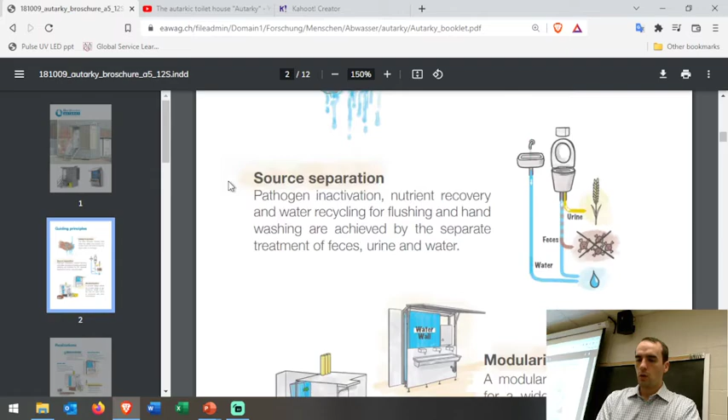Anyway, let me pull up that. There's first of all a brochure on the whole thing. I will post this in case you're curious - it goes into some more depth. I'll take a look back through this in a moment, but I'll go ahead and play the video for you here. Pardon me a moment while I get the sound situation set up.

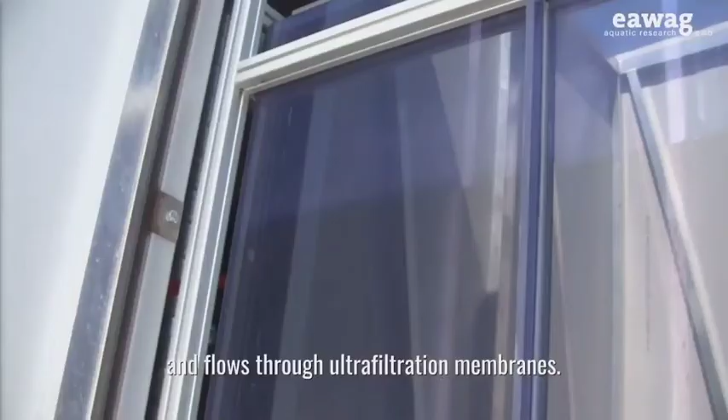Wir kommen hier zur Wasserbehandlung. Was wir hier haben, ist ein geschlossener Wasserkreislauf. Im ersten Teil wird das Wasser biologisch behandelt, fließt dann durch die Ultrafiltrationsmembrane und wird aufgepumpt, oben links in den Aktivkohlefilter. Nach dem Aktivkohlefilter geht es in den letzten Teil der Behandlung. Ihr seht dort oben eine Elektrolysezelle. Die produziert eigentlich laufend ein bisschen Chlor, wo das Wasser desinfiziert wird. So wissen wir, dass Wasser zum Handwaschen und zum Spülen sicher wiederverwendet werden kann.

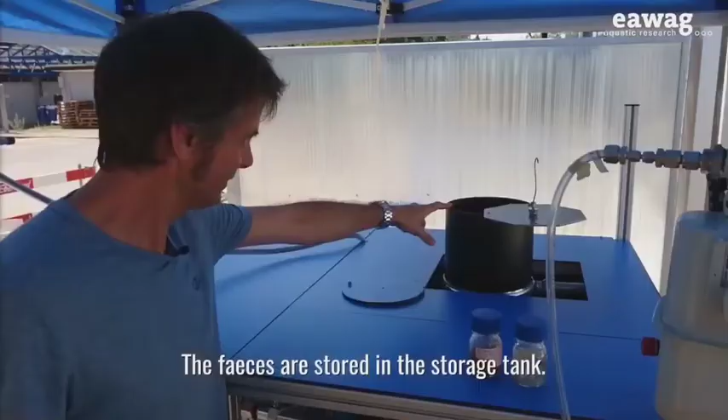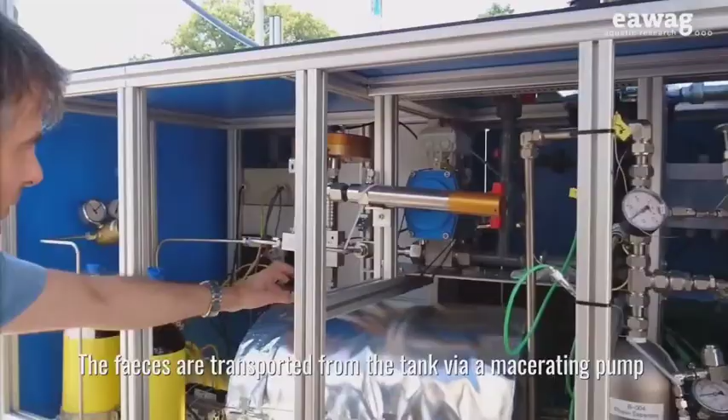Das ist der Vorlagetank, in dem die Fäkalien gelagert werden. Den mache ich mal zu, weil es ziemlich stinkt. Und dann werden die Fäkalien aus dem Tank mit der Zerhackerpumpe in einen Bereich geführt, wo sie zwischengelagert werden.

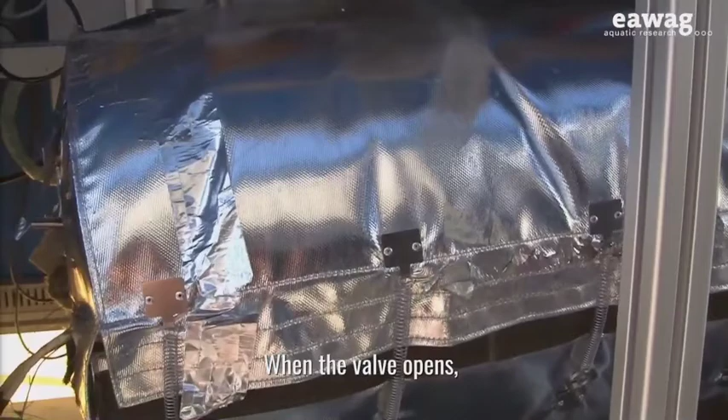Dann werden sie mit Luft beaufschlagt und dann wird das Ventil zum Reaktor geöffnet. Das heißt, die Luft schießt dann die Fäkalien in den heißen Reaktor und dann findet die Reaktion statt. Das ist eine Verbrennung. Die Temperatur, die da drin herrscht, liegt zwischen 400 und 600 Grad Celsius, und der Druck liegt ungefähr bei 300 Bar.

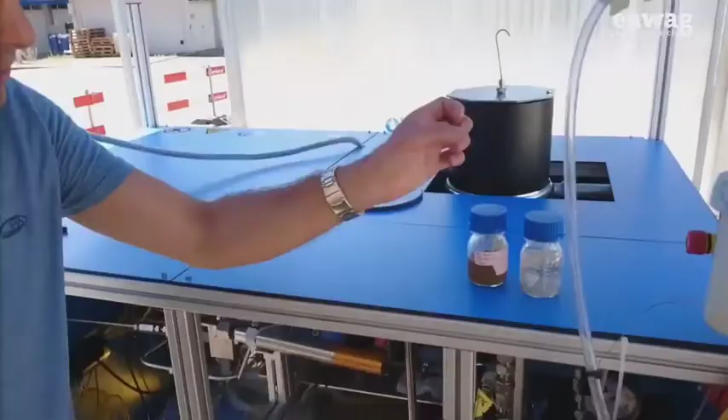Nach einer gewissen Zeit, wenn die Reaktion abgeschlossen ist, wird das Ventil am Ende vom Reaktor geöffnet und die Produkte werden in den Phasenseparator oder Kondensator entlassen. Und das Produkt, das dann rauskommt, in dem Fall, sieht so aus. Also wir haben hier die Flüssigkeit und die Asche, die sich schon am Boden abgesetzt hat.

All right, so what do you think? Interesting? Would you use that fertilizer? Let me get the lights back on.

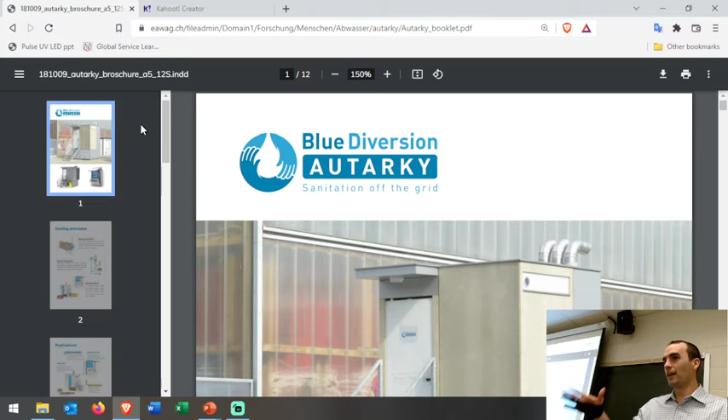Yeah, so there's a very interesting kind of setup there. I guess it's kind of a neat design. Obviously not super conducive for low cost. You saw lots of fancy equipment there. It's kind of neat that you can make one unit like that and have it nearly self-sufficient. I think there are energy inputs, especially with the incinerator. There have been similar designs trying to make something like that all solar powered, and then perhaps do electrolysis only to treat the fecal matter and stuff.

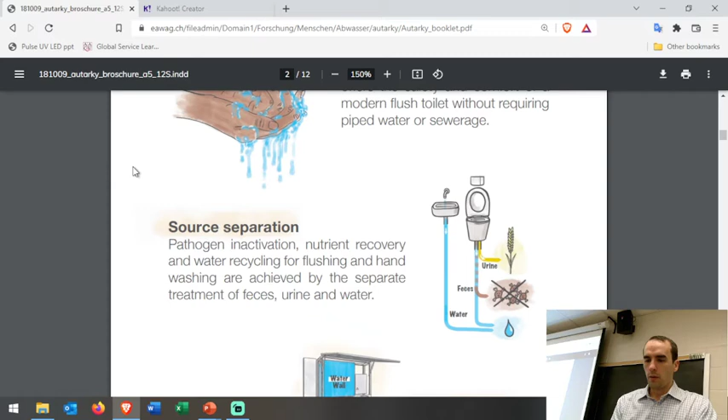So this is just one sort of technology that's out there. Pretty interesting. Essentially they're separating the gray water, which would be the hand washing. They're going to separate the urine as best they can, and then essentially modularize the different treatment steps. So you could have the urine processing, drying it out.

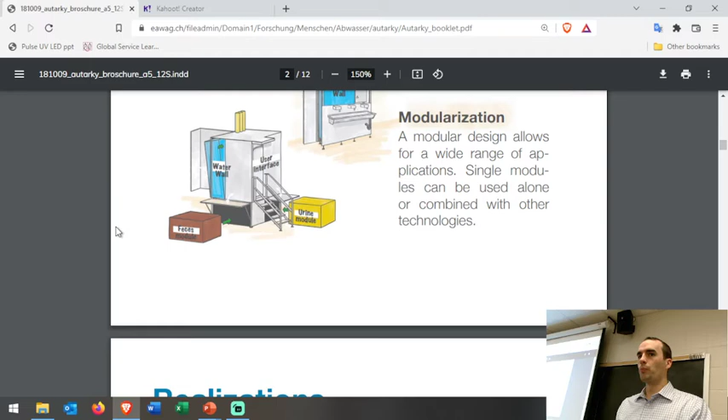It turns out urine is typically, or should be generally, free of pathogens. Somebody would have to have an active kidney infection or something like that for you to expect pathogens. So it's possible and worth some concern, but generally it's not very unsanitary. The direct drying of it is probably going to kill any pathogens that might remain, and generally bacteria can't propagate in a very hot, dry environment. So that's probably enough processing, just simply drying it that way for certain uses.

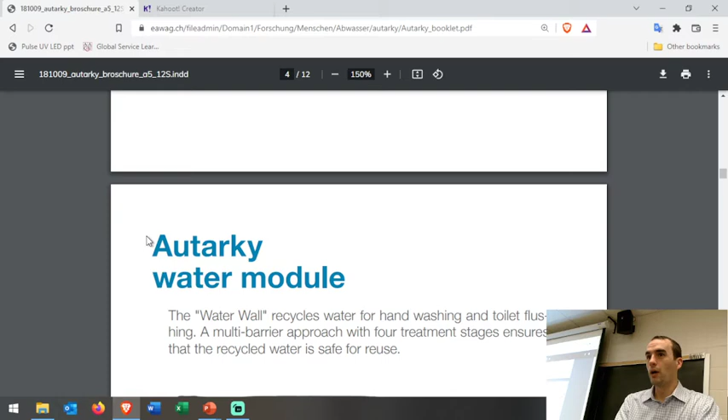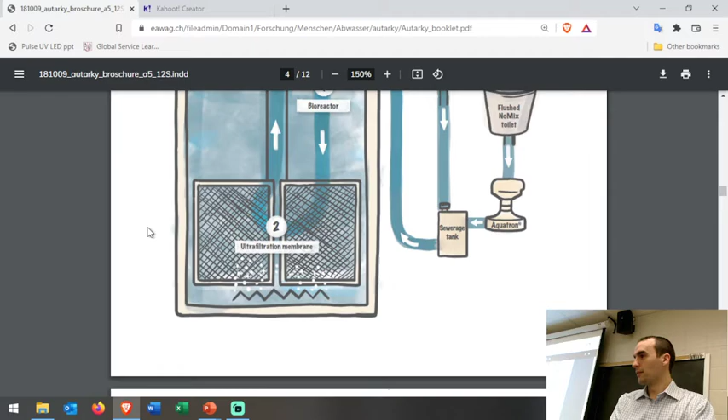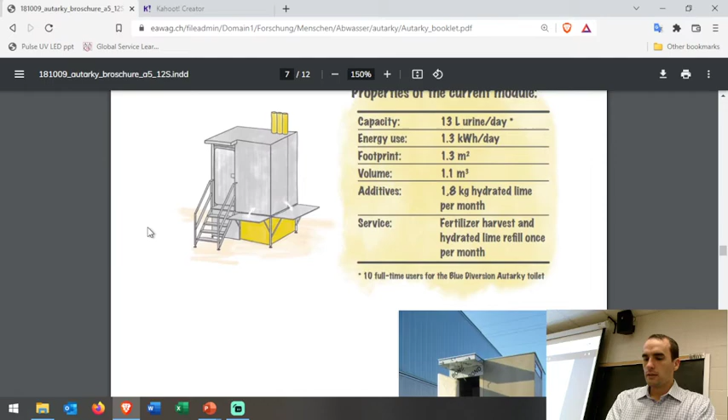Anyway, so lots of neat things about this autarky concept. The goal here is a self-sustaining system that can do everything all in one little spot. They envision several uses for it and all that.

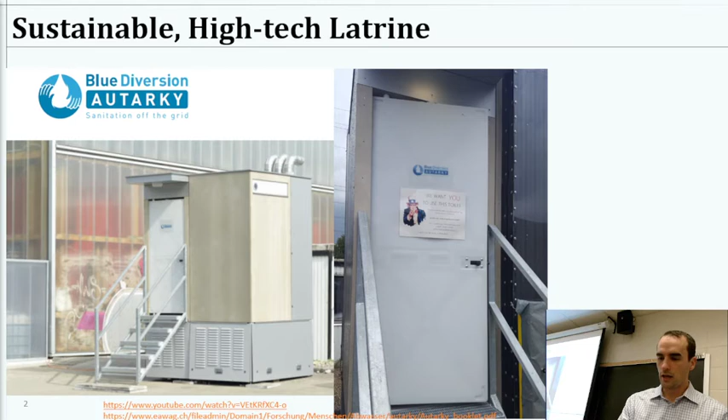So back to the autarky stuff here. Essentially they give a definition: economic independence or self-sufficiency. The idea is to make units that would be economically self-sufficient. Producing fertilizers could be a valuable commodity that could be sold. Obviously, thinking about it as the example they give, a utopian dream, there's certainly some aspects of this that aren't realistic and shouldn't be pushed too far.

Assuming that a very poor community would actually benefit from technology that is bound to break is not such a good idea, right? So that's a brief picture of one, I guess, the high-tech route to providing some sort of biosolids reuse, treatment, recycling, all that.

So generally, thinking about it in terms of composting, the simpler, low-tech method, there's a few things we have to consider. Some of this is a little obvious, but pathogen reduction - if we're going to reuse the stuff at all, the whole point of having a waste handling system is to eliminate the transfer of pathogens, and/or confine it to a certain location away from human contact.

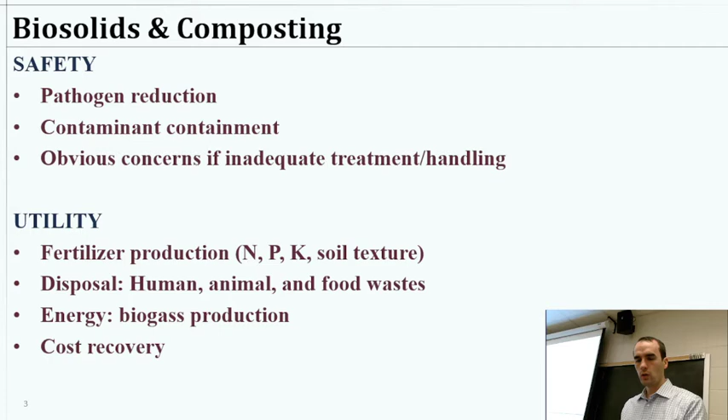So what do we mean specifically by biosolids composting? The technical term would be the aerobic thermophilic decomposition of organic constituents to a relatively stable humus-like material - humus being like soil-type matter. If you grab a handful of potting soil, what do you call that? Soil, sort of. Humic substances is a term we use to describe organic material that is soil in nature or soil-like. So that's the technical definition, and aerobic means we do have oxygen, so we have access to ventilation for the process.

We have thermophilic, meaning liking heat, so a biological process that likes the heat and will do well with the heat. And what it's doing is decomposing, destroying or breaking apart the organic matter into simpler stuff, ultimately forming this humus-like material. That's going to, in some sense, homogenize it into something that looks a little bit like potting soil.

So there's a few environmental factors to consider, whether you're talking about third world or industrial scale. In either case, you have to consider the moisture content. It's essential for the biology to go forward. You have to have enough moisture, but you also don't want to flood it with too much, because that's going to lead to anaerobic pockets, which will kill or disrupt the process and make it really awkward. So control of the moisture content is really important.

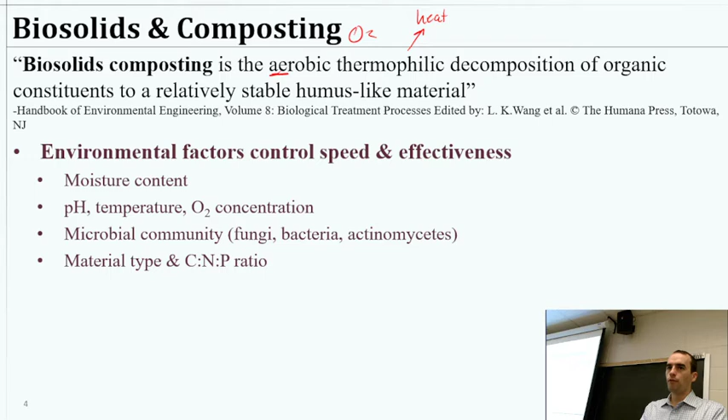pH is going to be important. Temperature, oxygen concentration, all of those things are going to determine how long it's going to take and the effectiveness at pathogen reduction. The microbial community ties directly into that and is really reliant on several of those things. Essentially, it's a biological process—you want specific types of organisms to be growing, different classes to be able to grow, so you have to make sure the conditions are proper for that to occur.

Then you got to consider the material type. This also matters for what your yield, your outcome, is going to be. If you're composting something that's mostly separated feces, that's going to be a lot different than if you have urine mixed in, or if you're recycling food scraps into the compost. There's a lot of factors involved where you may need some consideration for your endpoint based on what you're putting in.

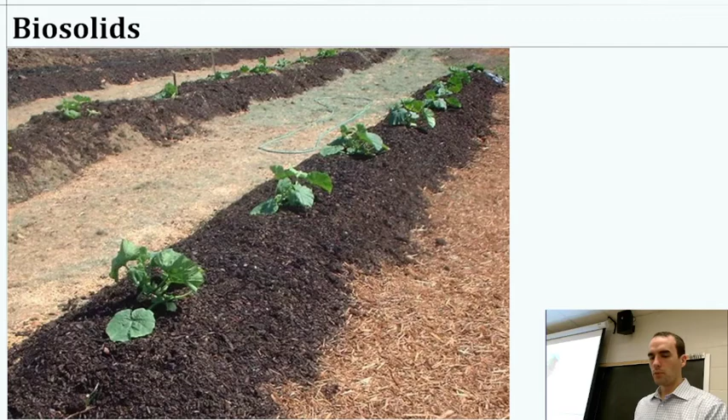So then the biosolids—this is kind of an example here. I'm not positive, this image, you just find it if you search for biosolids, but I believe this shows rows where they've essentially seeded in these biosolid kind of topsoil sort of deals. So that's what it would look like in practice. I think I have a couple more pictures.

Ultimately what you want is something that's akin to topsoil or potting soil that's nutrient rich, arable—you mix it in with the soil, put it on top, and it should provide a lot of benefits. So if you till it into soil, depending on the soil you had in the first place, there's a lot of benefits it can provide. Here's a bit of a list. Obviously, the value is coming from the fertilizer, but also from the fact that you might be able to take land that was not so arable, not so farmable, not so good for plants to grow, and transition that into something that's going to be a much better foundation for crops to grow in.

Offsetting some costs, providing the nutrients, including potassium, also some micronutrients if there's things plants need and aren't getting from the soil, or are limited. All this organic matter has a good chance of providing some of that as well. Some indications say it could reduce the need for pesticides—that may be the case if the plants are growing more healthy, not as susceptible to pathogenic or predatory action by insects attacking the plants. They may have a better defense with better nutrients and better soil.

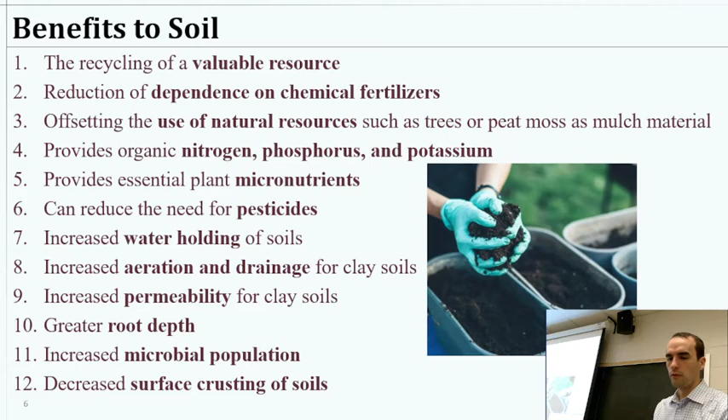Okay, these will lead to greater root depth, all of these things benefiting intended uses for the soil. And potentially decreasing the surface crusting, which would kind of cause runoff instead of rainwater penetration. Okay, a couple of disadvantages, and here's some more industrial application views here.

You can potentially literally take a truck and spray it. In this form, it's going to be slightly liquid still, enough to pressurize through a pipe. And so you could spray it like that. You could take a tractor of it and have some sort of a sprayer on the back of that.

There's actually several potential disadvantages, especially for the workers or for the people living nearby if you have a large scale system. Would also apply to small local communities depending on how much interaction they have directly with the biosolids, right? So once it's processed, it's relatively safe, but you still have odor. It's not going to be too pleasant, especially if the process perhaps did not get quite enough oxygen or something. There's definitely some potential for it to be pretty stinky.

Survival of some primary pathogens in the product - we can expect that can and probably will happen to an extent. A lot of the designs are aimed at reducing by some amount. So if we had a lot of pathogens, but we reduce it by 99%, that means there's still some surviving, right? So we may have accomplished our treatment goals, but still there's some around, and that's a concern.

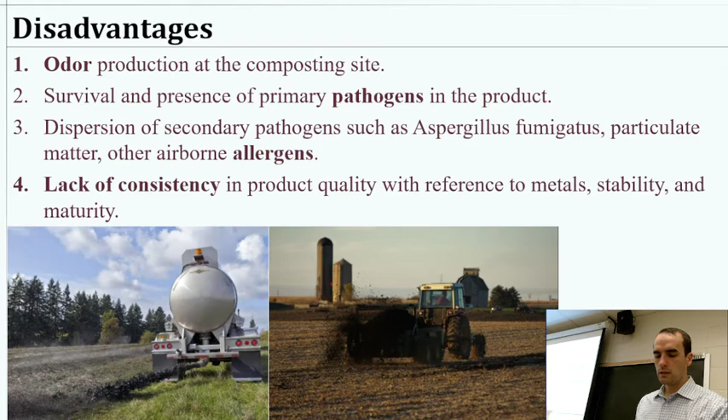Could cause some problems - heavy metals really is more of a concern for larger scale systems where you have a whole bunch of inputs all concentrating into the solids. So that's not as big of a deal for, let's say, an individual home or small community doing that.

Okay, so a little bit about the formal processing and, at least on our side of the state, what constitutes biosolids and effective, appropriate biosolids treatment. So we categorize them into two classes - we have Class A and Class B.

So Class A are the most stringent standards. They allow for public contact. And really what that's meaning is, if you were land applying them, you could do so let's say in a park or something like that, where you have a garden. Something like that would be allowable.

For the no public contact, I think you have to keep it away from public roads by a set distance, and it really has to be on pretty much an agricultural site. And I think there may also be restrictions with what types of crops you can put it on because of expected public contact with the produce.

Okay, but Class B is useful for many cases where the agriculture is going to be benefited, and you don't have to have quite as high of a treatment standard. The processing can be quicker, but it's only allowed in certain cases.

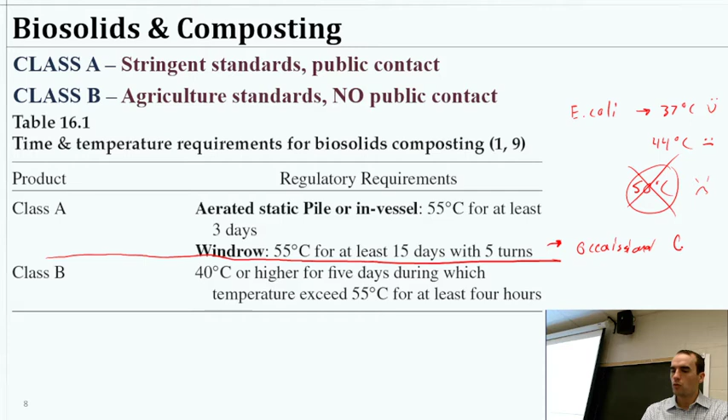Essentially, this is occasional oxygenation, so only occasionally do you mix it. I don't know if we need two S's there, I'm going to assume occasional aeration versus constant.

Because otherwise, it sounds like that's a lot longer of a time frame to have that high of a temperature. But I think the deal is, when you mix it at least 5 times, that's going to make sure everything's aerated properly, so you have enough mixing. Whereas the aerated static pile or the in-vessel method, you have air flowing through it pretty much constantly to provide the aeration.

So then class B is 40 degrees Celsius or higher for 5 days, during which the temperature exceeded 55 degrees Celsius for at least 4 hours. So you have to hit that 55 mark for at least 4 hours out of 5 days.

Perhaps your temperature profile starts kind of low, you hit the 40 mark, and then eventually you hit a spot, and then it tapers back down. If this is the 55 mark, that's going to require less energy input, less process design, and a quicker time than if you had to do for the class A, where you had to be up here already and stay up there for the 5 days, if this was like a 5-day period here.

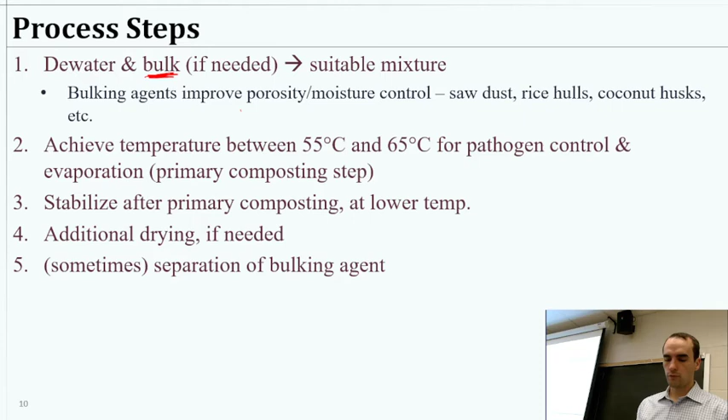Speaking of moisture content, we really have to hit the right moisture content - good enough for bacteria to grow, but not too much, to prevent oxygen issues like I mentioned earlier. So the ideal is about 40 to 60%. You really have to have 40% moisture content or better.

So that's actually a lot of water, right? This is on a mass basis, so 40% of the biosolid stuff is going to be constituted by water. If you have less than 15%, you're going to inhibit basically all bacterial activity, so that's a big no-go. Less than 40%, you're looking at a case where you may be inhibiting the bacteria - they just don't quite have enough moisture to work with.

And I believe this is to start the process, so as some evaporation occurs, you expect that to be decreasing over time. Really this inhibition is probably some areas of the soil getting too dried out from evaporation by the end of it, to carry the biological process through the whole thing.

So we have some optimal amount here - 50 to 60% of it should be water. And then above 60%, it's typically too muddy, so at that point you'd want to dewater or maybe look into adding a lot of bulking agents.

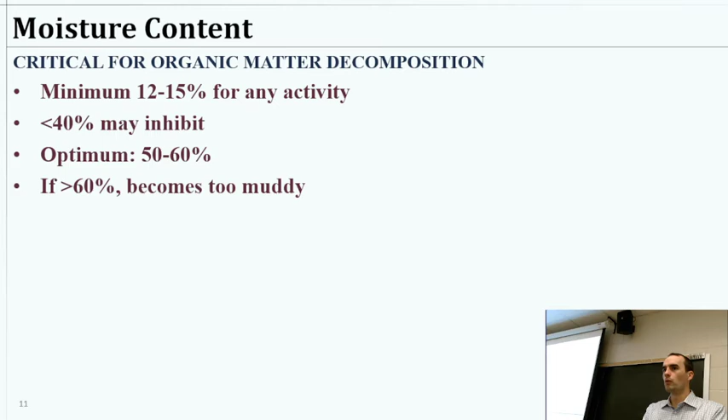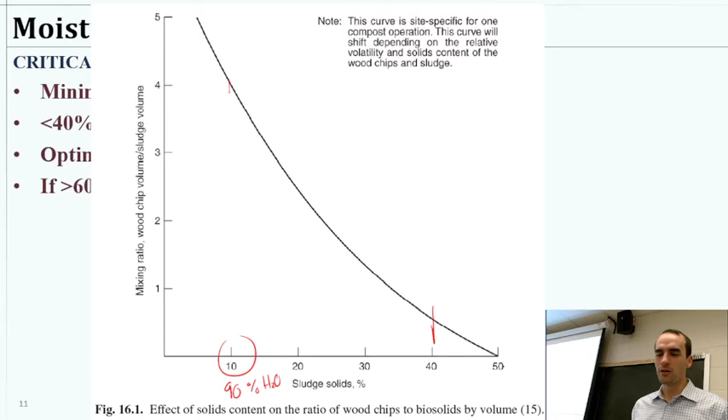I haven't done any composting myself since I was a kid, and my mom had something on her back porch where we would add some worms, throw in our coffee grounds, banana peels, whatever. Certainly not biosolids composting, but thinking about it now, I wonder how I would approach that process differently. Should I add a bit of water to it before, put a thermometer in there? The scientist in me is now kind of thinking back on it - if I was to do this in my backyard, how would I do that differently now?

Okay, so the approaches we mentioned earlier - again this is really the industrial scale portion so we can understand the needs if we're going to design something similar, what are the process needs for it to happen. That's why I'm going into the industrial scale, even though it might not be as relevant directly to our class.

So the first is an aerated static pile. Essentially we have a bunch of our biosolids sludge stuff, we make a pile, and then we add some sort of cover or blanket that's porous to the air, and pull air through that pile into some pipes. Presumably that sludge has to be porous enough to allow airflow through it, and that's going to oxygenate the entire system. With the airflow, we're also going to get a lot of water seepage during this process, so that has to be collected.

But with that, we can then extract air and exhaust it through some sort of filter - maybe that's just a pile of screened compost, or some other filter type. We're essentially moving air through the system. That's the static pile process.

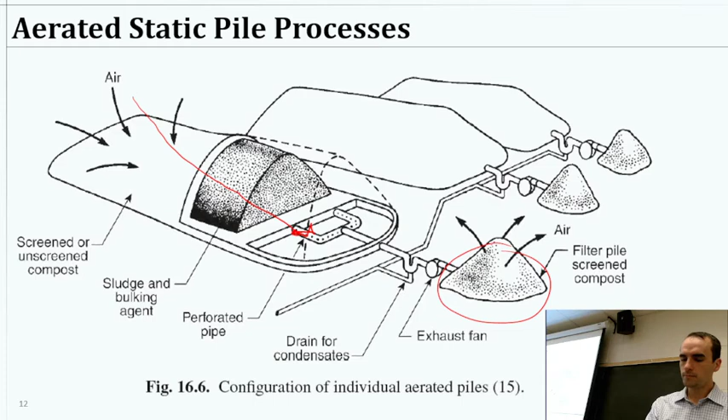So that's a bit in contrast with what we might call an in-vessel system. We mentioned that's the other way to get a Class A biosolids. Here you can design it any which way you want, but essentially you're going to have some type of plug flow reactor where you have the ability to do continuous processing. So you have solids being added to one end, and by the time they slowly get to the other end, presumably you'll be able to take that stuff out, and it will have experienced 3 days worth of the right conditions. So in one of these, you'll have compost being added at the top.

It's slowly flowing downwards. You're adding air here, so air is being injected through it and flowing up through the pores, and you'd be collecting your biosolids out here. That would be your residence time, assuming you're keeping this at 55 Celsius or more, you could have a residence time of 3 days in that vessel.

Several different ways to design this. You could do a graded system with a porous media air injection system, and this is essentially a mechanical screw extracting the biosolids that way. Or you could have something that goes left to right, a horizontal instead of a vertical system.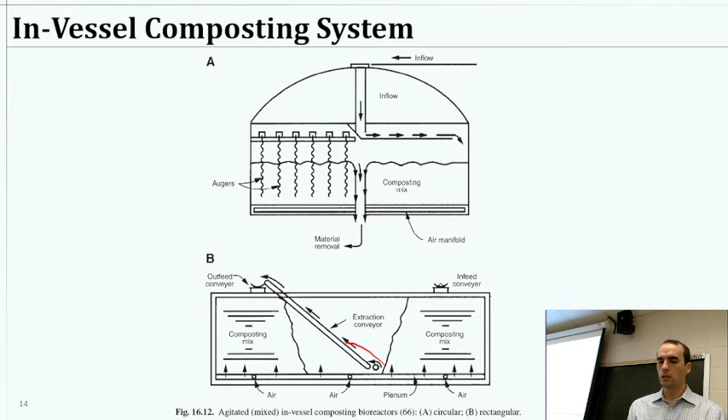So that brings us to our point of use systems. How are we going to actually make use of this in a more developing context? Well, the first and probably more obvious thing to do is to separate urine, because if you can do that, there's just a lot more you can do with it.

It's going to be generally beneficial for your composting. If you have too much nutrients in your compost, sometimes it actually becomes a problem where you've got too much ammonia and it poisons the microbes. So if you separate urine, it tends to be good for both systems, controlling the amount of water in your compost and controlling any other issues with nutrient balances.

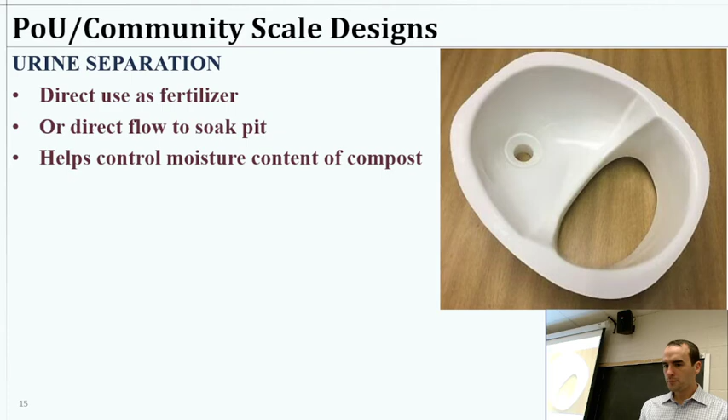Okay, so then you can take the urine, either send it to a drying system to make fertilizer, or directly flow it into some sort of a soak pit. That would be a case where it might make sense to have a tree near the pit where you're soaking it in, the tree can benefit from the fertilizer over time, and it's not a big pathogen hazard. Likewise, it gives that moisture content control.

Okay, there's a few other ideas here we could consider. One would be a solar composting latrine. So essentially you've got a latrine like we just saw, there's some old pictures I found on the web from somewhere. And here we have a system where maybe you can power some of the functions with a solar panel.

But what they have here is actually just a solar window, to provide plenty of heat, essentially a greenhouse effect for the composting material. You're adding that as a way to generate heat, and it's hard to tell from these pictures, but it looks like those are deciduous trees turning brown in the fall, so it's probably in a northern climate of some sort, or at least not tropical. I'd expect that's more important for areas that would otherwise get pretty cold; maybe it's not needed, or you don't need as big of a solar window design if you're already in a hot and humid area. Might not be as big a deal, but certainly an interesting design concept to add.

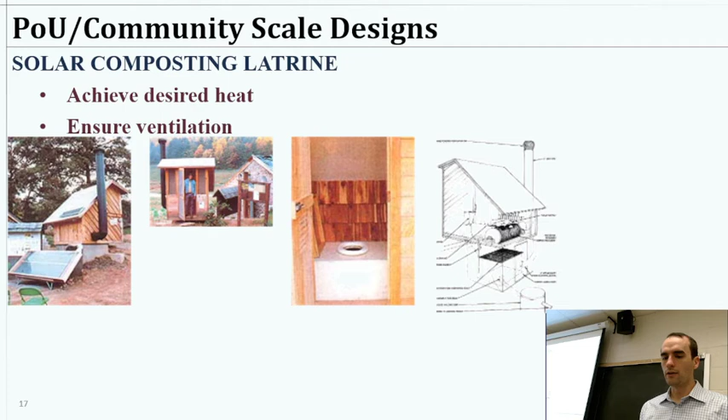So here's another schematic and a link we can take a look at. Just gives a little more description. I think this link shows kind of both of those, but one of the interesting designs you could come up with is...

You have this latrine system and a solar window to allow composting, and essentially your solids are collected in a binned bucket system where you can rotate a few weeks' worth of solids exposed to the sun in the warming window. It's a carousel system where once that bin is full, you shift it, giving room for new solids entering here.

These have been kept there for maybe a week, then it rotates, and these have been there for 2 weeks and experienced the solar exposure, and in the final one you empty that as your biosolids for fertilizer or whatever, making room for the next rotation.

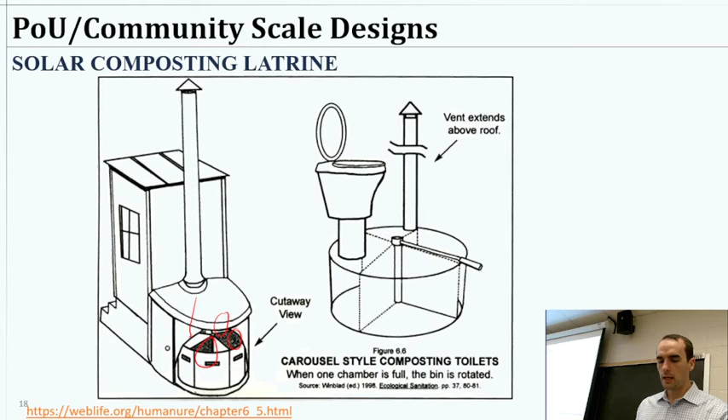Of course you're going to want venting and all of that. So that's kind of an interesting concept, relatively low tech. Again, none of this is going to be a particularly fun job to manage, I wouldn't think.

Okay, so just one little final look, the simple case: you could have that VIP toilet latrine system and simply a solar window there. Of course, you'll have to consider how to construct all of this to make it structurally sound, and all of that.

Okay, actually what I'll go ahead and do is just pull that up. So in case you wanted a little more context about these projects, this is where I got that information from. It's a neat little article on commercial composting toilets.

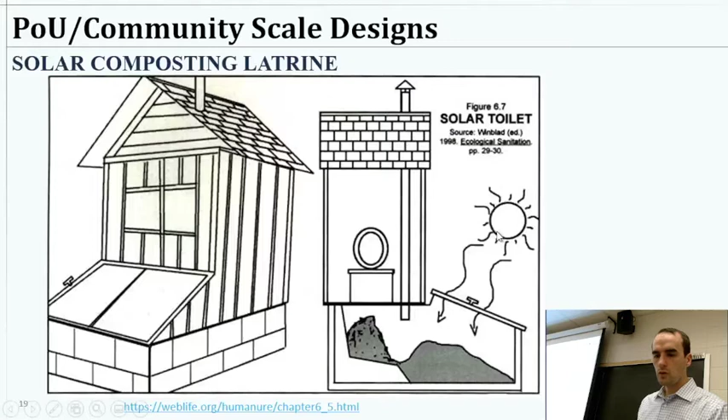Okay, so any questions on that? Didn't mean to close that, but okay. Any questions on the composting?

We've got a biogas video which is related. Again, as I mentioned, it's a little more industrial scale, and it's kind of funny, the video production quality is amusing, we'll see. But I think it does show some interesting processes and technologies here for you, so I think it's worth a watch.

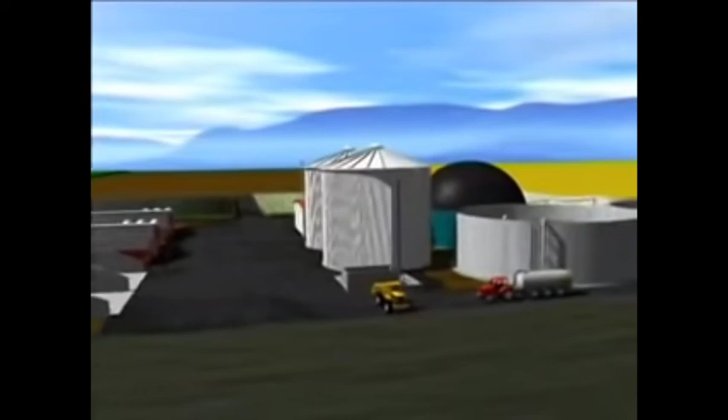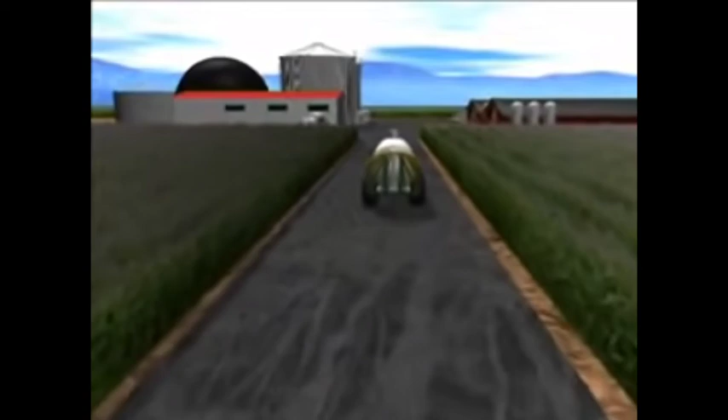Welcome to a virtual tour through one of BioConstruct's biogas plants. Controlled fermentation of biomass in biogas plants produces a gas that can be used to produce electric or thermal energy on account of its high percentage of methane. The raw materials used in biogas plants, also known as substrates, are often liquid manure, agricultural products and agro-industrial waste. The following animation will demonstrate how electricity and heat are produced from these substrates in biogas plants made by BioConstruct.

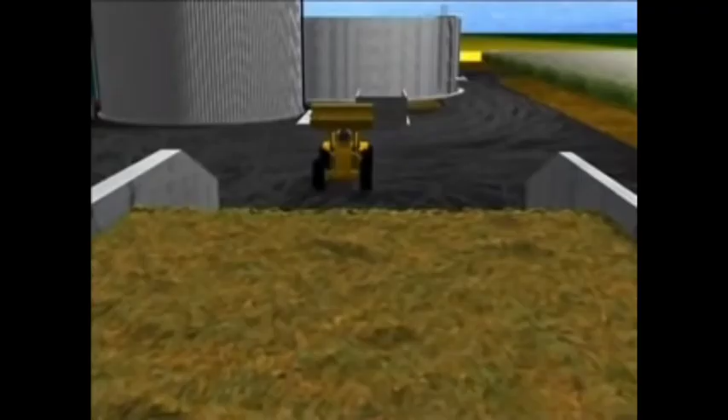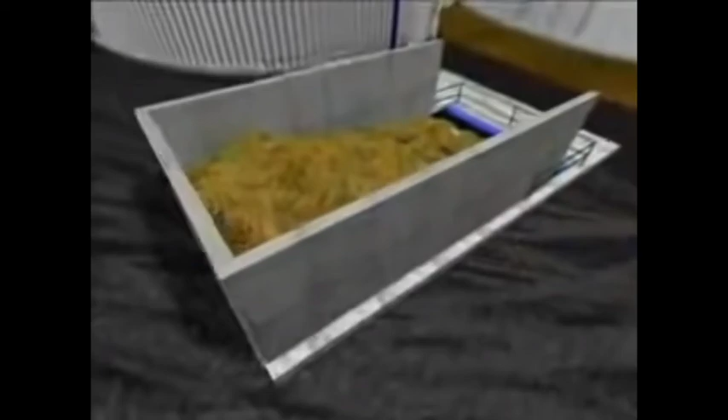This biogas plant uses ensilaged maize as one of its renewable raw materials. With the aid of a wheel loader, the maize is tipped into a cement storage bin, which needs filling up approximately once a day. Silo maize is rich in energy and, due to its high degree of reduction, very well suited for use in biogas plants.

This storage bin is equipped with a hydraulic floor discharger that continuously feeds the maize onto a conveyor belt. A scale under the conveyor belt registers the weight of the maize silage.

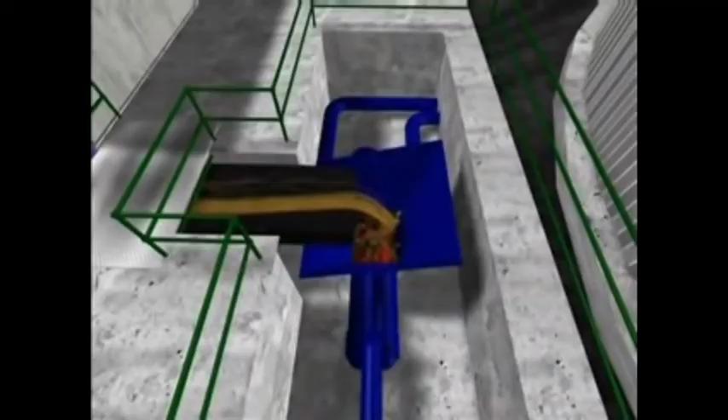Liquid manure is the most important basic substrate used in this biogas plant. After a short interim storage in the pigsties, it is pumped through pipes directly into the blending pump beside the maize conveyor belt. At the same time, the maize falls off the conveyor belt into this apparatus, which is equipped with 2 mixing rollers. In this way, the maize silage is mixed before fermentation.

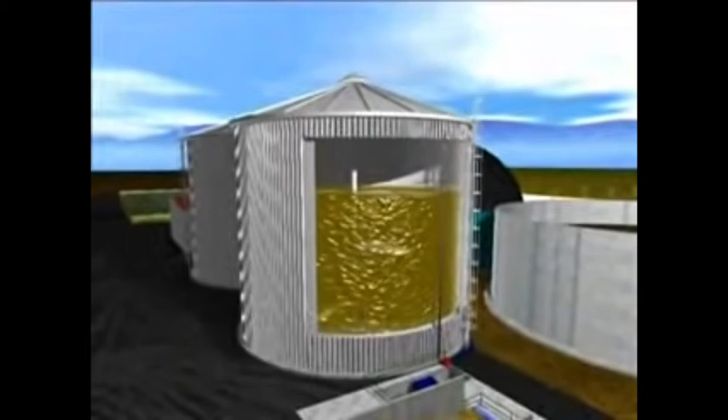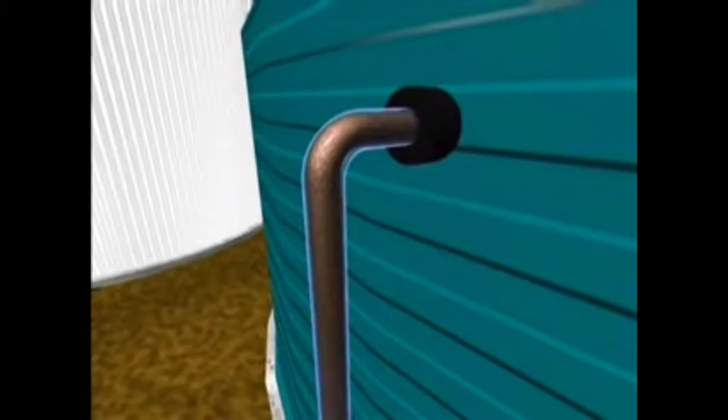With this technology, it is possible to supply several fermentation tanks, also known as fermenters, with fresh substrates, even if they are not close together. Liquid waste from the food industry is the third substrate used in this plant. As the availability of such waste varies considerably, a large storage pit should be installed. Integrating this into a hall serves to minimize smells and to help prevent epidemics.

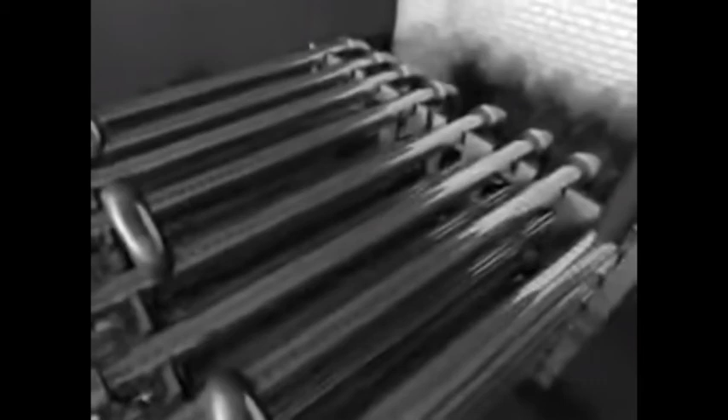Now the liquid waste is heated with hot water to 70 degrees centigrade in a tubular heat exchanger using a countercurrent process. After heating for 1 hour, the hygienization of the substrates is complete, so that they can now also be poured into the fermenters.

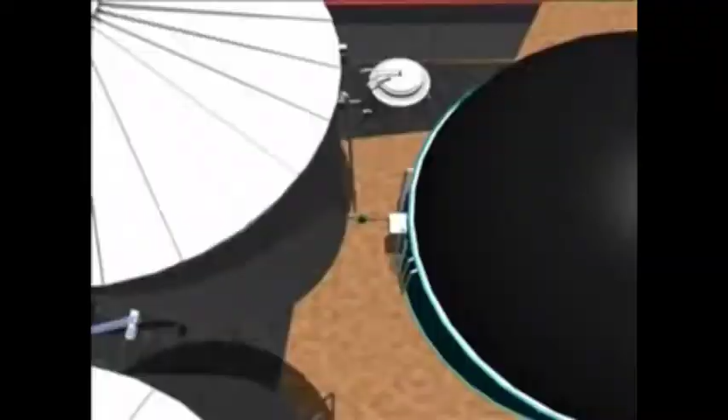Here is where the biogas is formed. The substrates are continuously stirred in order to prevent layers of material forming at the top or on the bottom. A hot water wall heater heats the substrate to between 35 and 55 degrees centigrade in order to accelerate the formation of methane. On average, the substrate is in the fermenter for around 30 days, before it is filled into another fermenter for a further 30 days to complete the gas formation process.

When fermentation is complete, the thin liquid substrate is pumped into 2 reinforced concrete tanks, where it is stored until it can be brought out onto the fields.

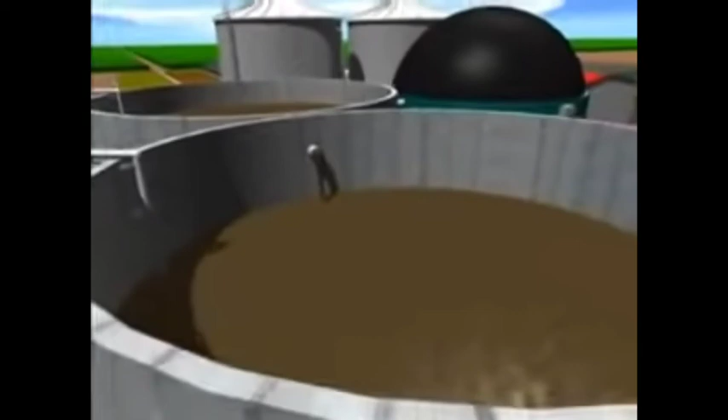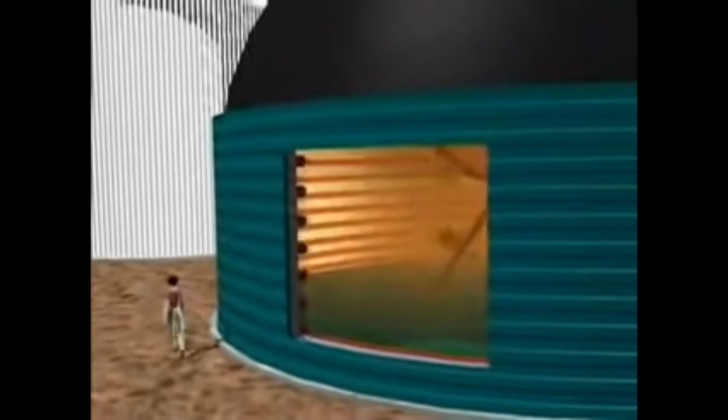If the fermenters are filled regularly with biomass, are airtight, heated and regularly stirred, the biogas forms within a matter of days. The formation of gas is a complex and delicate process. The organic fats or carbohydrates contained in the substrates are digested by various kinds of bacteria, and this is the starting point for the development of the gas.

If the contents are continually stirred, the gas rises slowly to the top of the container. It consists of approximately 50 to 70% methane, coloured green here, and also carbon dioxide, water vapour, hydrogen and hydrogen sulfide. As water vapour and hydrogen sulfide are problematic for the utilisation of the gas later, it is necessary to treat the biogas now.

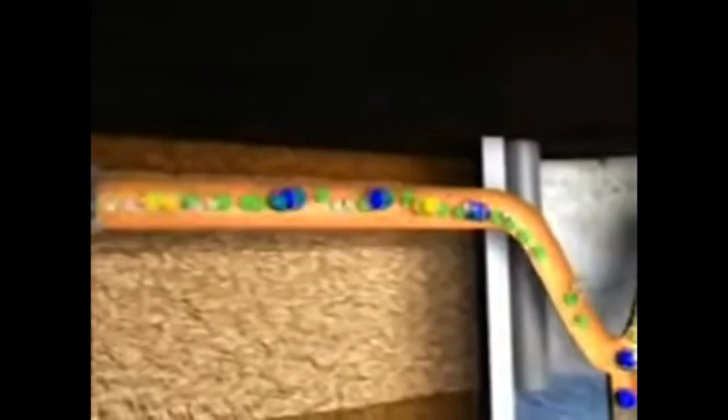The gas is first freed from water vapour, coloured blue here. The condensation water is collected in a condensation shaft and pumped out.

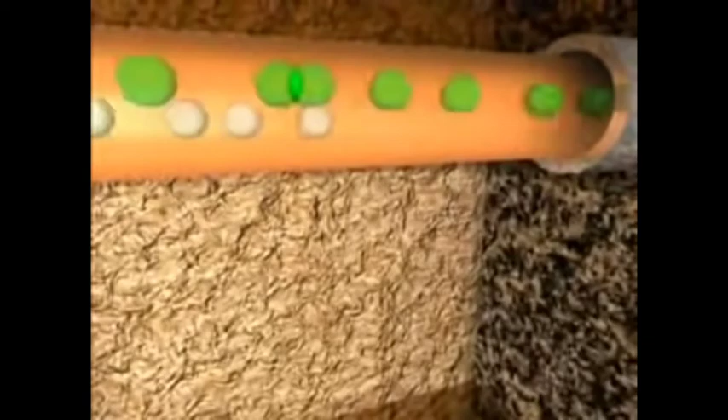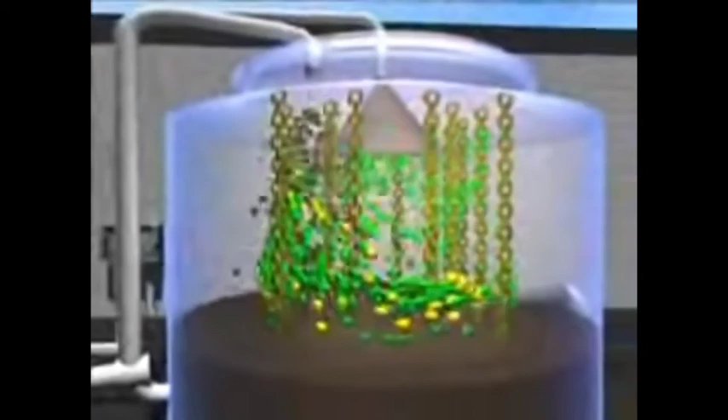The aggressive trace gas hydrogen sulfide is now extracted from the biogas in a biological desulfurization plant. By introducing air into the container, certain bacteria cultures are able to establish colonies on the chain. Here they decompose hydrogen sulfide into harmless sulfur and water.

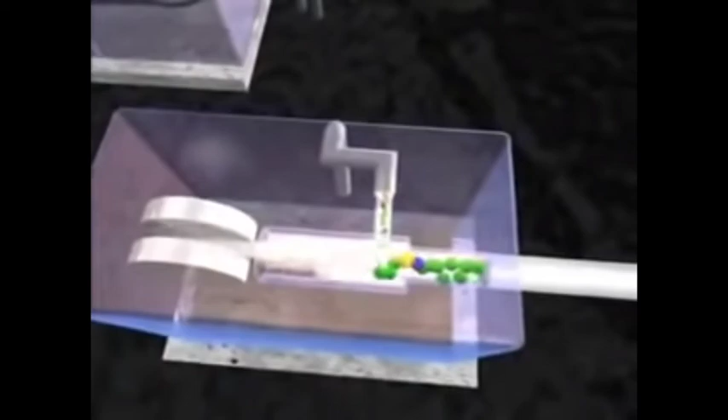The almost unpressurized biogas is then fed into a compressor, where it is brought up to the 70 millibar pressure later required for burning. In order to completely condense any remaining water vapour and to free the biogas from any suspended matter or silicates, the biogas is subjected to a washing and drying process.

This is carried out with water at almost freezing point so that the gas is cooled down to a temperature of under 5 degrees centigrade.

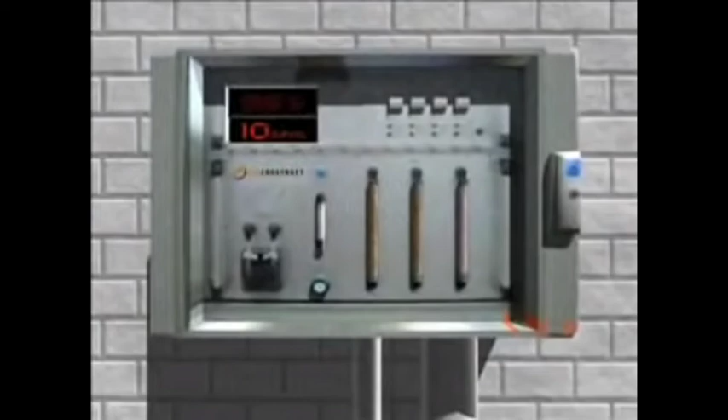In order to control the purification of the gas, the biogas is constantly tested with an online measuring system, which records the amounts of methane, hydrogen sulfide, carbon dioxide and oxygen. This guarantees a high degree of efficiency and security.

In case of any overproduction of biogas, it is necessary to operate a gas flare, for unburned methane that escapes into the atmosphere is harmful for the climate.

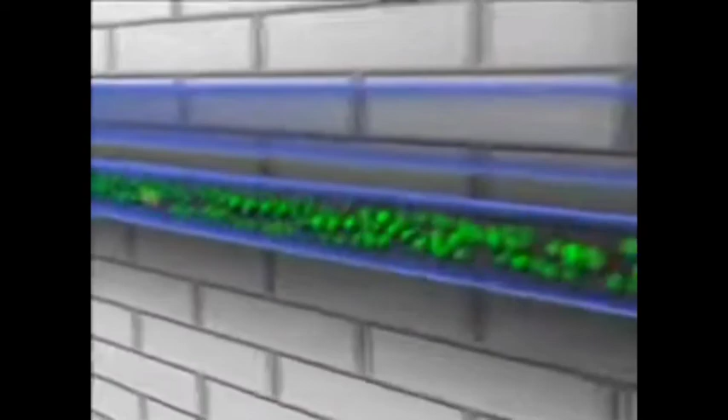The biogas from this biogas plant enables block heating and generating power stations to run and be CO2 neutral. To annually process biogas from 15,000 tonnes of biomass, this plant must produce a total of 500 kilowatts of electricity.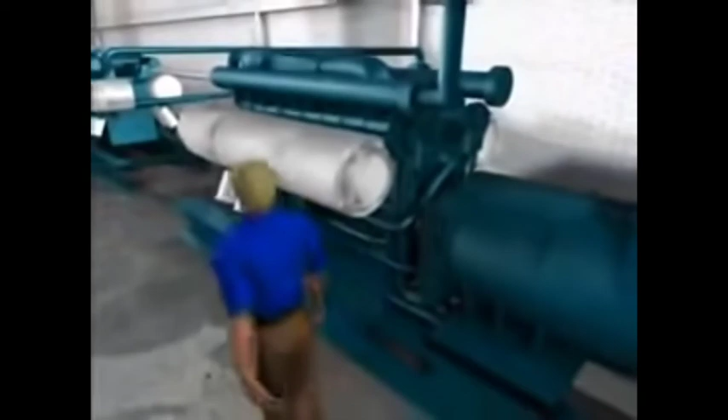Due to the optimal gas processing, the engines can run round the clock for several years with only a minimum of maintenance costs.

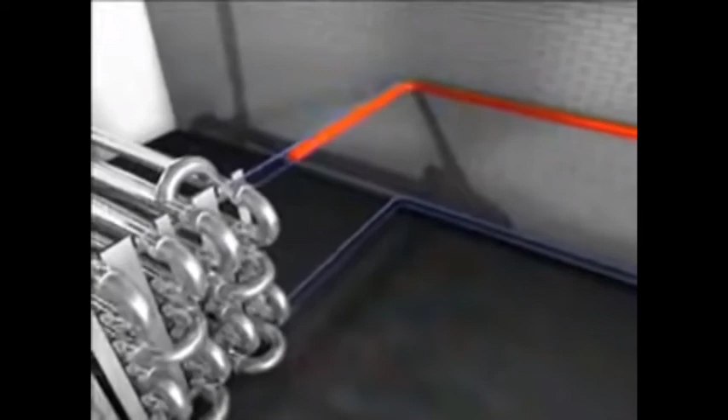Up to 30% of the waste heat from the cooling water of the engines is used for the heat exchanger and the fermenter, so that no additional heat is required. The remaining heat can also be used profitably to heat industrial plants, houses or swimming pools.

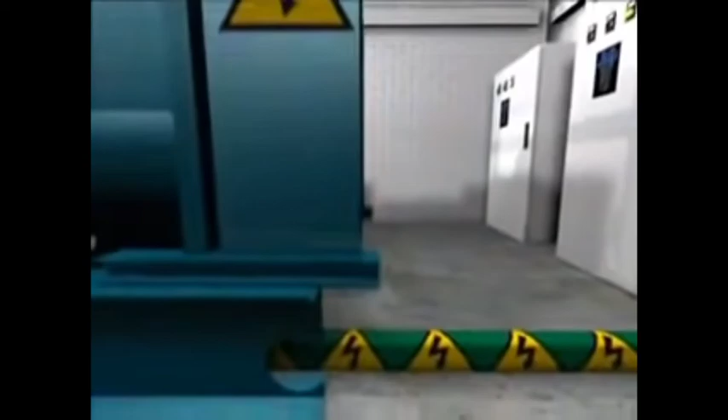The electric power generated by the generator of the block heating and generating plant is converted to the mains voltage level in the transformer. Then the electricity can be fed into the grid and meets the annual requirements of around 1,000 households.

Okay, so that's pretty much the technological side of things that we really cared about.